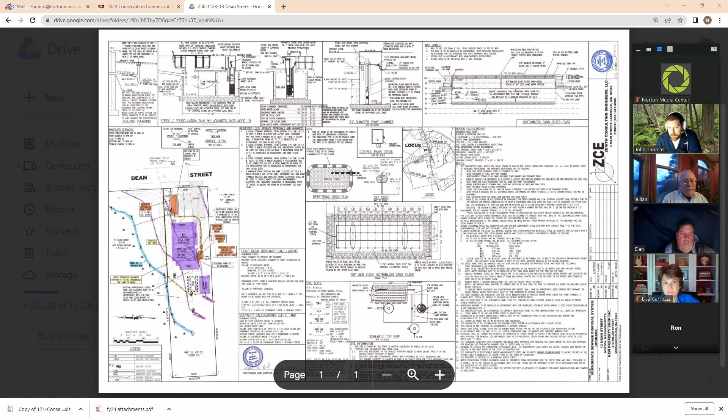Can everyone see this plan here? Yes, yes, okay. So the concerns that I had - I went out to the site, and the applicant needs to map the wetlands going from wetland flag 10 and going closer to the adjacent property because they actually come closer to the house. So I asked him to meet me out there tomorrow so we can take a look at it and make a determination on where the wetland boundary is supposed to be, along with checking on the status of the nearby stream, which is off the map to the left-hand side. It was flowing, I don't know if it's perennial at this time, so they'd have to make an assessment on that. So there's a couple unanswered questions they need to address for this application to be complete.

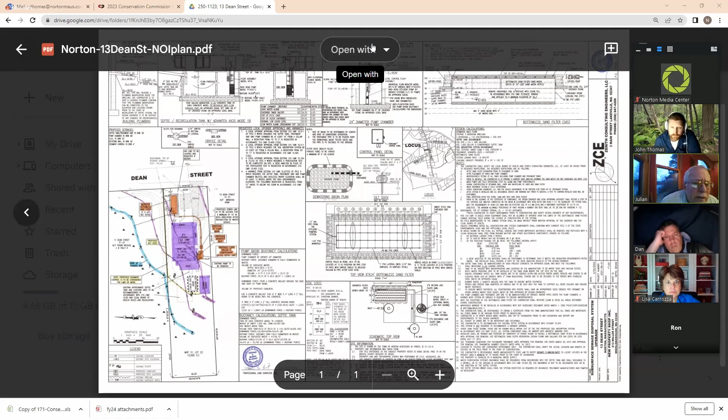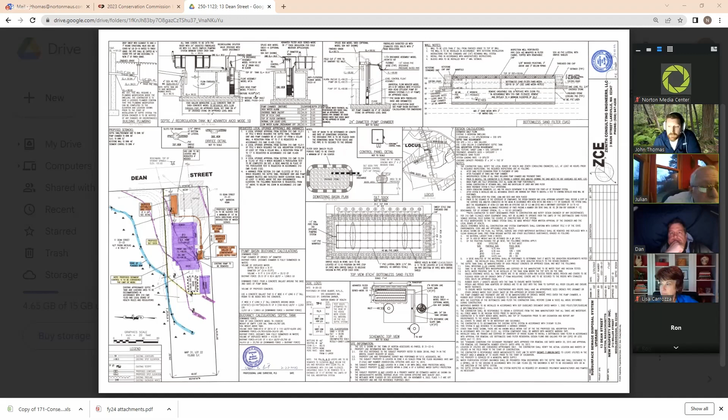There's that box in the back with the dotted line around it, and it says, I guess, to receive dewatering water from the front. Is that... you're talking about the D-box for the SAS system? No, in the back - so you have the house in purple, and then another box in purple behind it, and adjacent that box is a rectangle with a dotted line around it, and that's to receive dewatering water, is that right? For the septic system? I'm sorry, I don't know what you're talking about for the box. Well, you see on the plan, yeah, the house is in purple, yeah.

There's an existing garage in purple, and right next to that garage is an illustration of the dewatering basin. See detail. All right, so that gets pumped around from the excavation in the front.

Is that the idea? So my understanding from this whole plan, and the applicant can present the findings, is that the septic system is going to go on the front of the house. They're going to abandon the existing septic system, which is currently in the back of the house. I don't know what the dewatering basin is for, because they shouldn't be doing any work over there, and I don't know what the status of that is either.

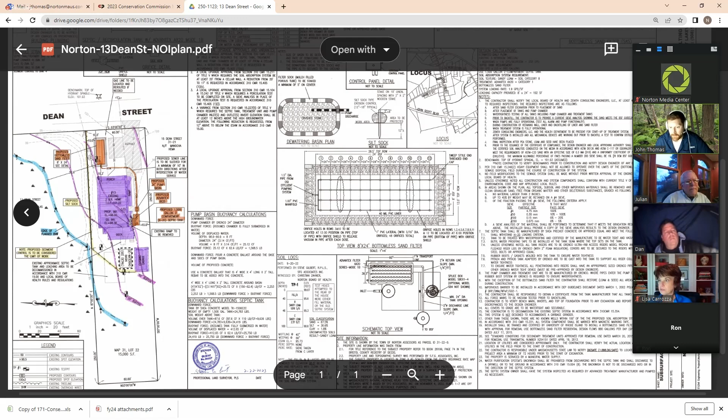What I do know, and my concerns are, is that there's a wetland that loops around and horseshoes up closer to this house on the right-hand side. They need to make sure they meet the Board of Health setbacks from the wetlands. It's 50 feet, so they have to meet that at all times, and there's no exception for any waivers. So their design may change based on that setback. That was the concern I had for them, that they need to address the wetland delineation. That's why I'm going out on Wednesday to confirm the wetland delineation and also continue and finish the delineation itself with the applicant.

All right, so we raised some questions. I think we detailed the additional information that we're going to need, and we can now consider a motion for a continuation of this hearing until March 27th.

So moved. Second. We have a motion made by Dan and seconded by Lisa. Roll call vote, starting with Dan and Tama. Aye. Aye. And Mark and Ron. Aye. And I'll throw in an aye. And Lisa, how do you vote? Aye. All right, motion carries. This hearing is continued until March 27th.

Next hearing is a continued public hearing, notice of intent, file number 250-1113, for 0 East Hodges Street. They also request a continuation until March 27th.

So moved. Second. Motion made by Dan, seconded by Lisa. Roll call vote, starting with Dan and Tama. Aye. Aye. And Mark and Ron. Aye. Aye. And Lisa. Aye. And I'll throw in an aye. So that motion carries.

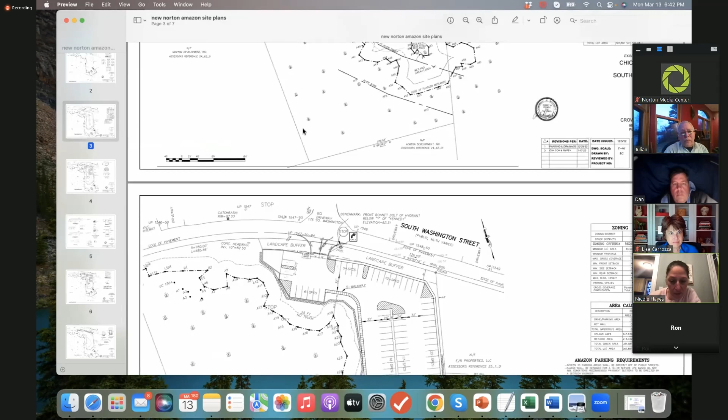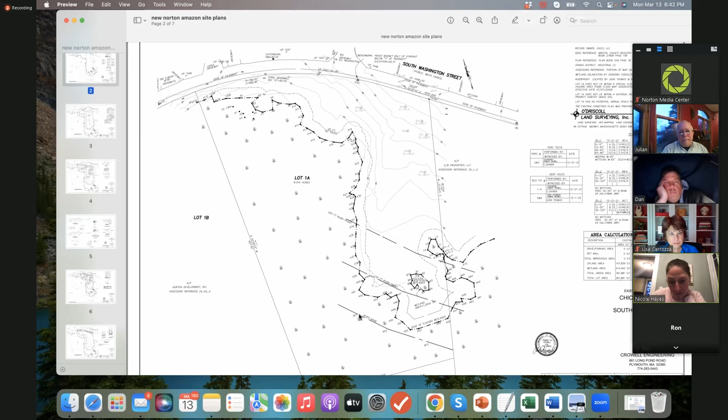And now it looks like it's, okay, we got it. All right. So this was the existing line here. We did an ANRAD to solidify the wetland resources. We have an isolated wetland here. This was joined into bordering vegetated wetland during the ANRAD process. The river bank is down here. This is the 100-foot riverfront area and the 200-foot riverfront area.

So here's the proposed conditions. It's an Amazon parking lot. This little section right here is the proposed work within the outer riverfront area. Again, this is the 100-foot riverfront line, and this is the 200-foot riverfront line. So we're proposing 1,310 square feet of alteration, which is far below the 5,000 allowed, or 10%.

We have done an alternatives analysis, and we also did a performance standards analysis that was given to the commission last week. I can go over that with you if you would like me to go over that. I think if John, you think that would be helpful, you reviewed that?

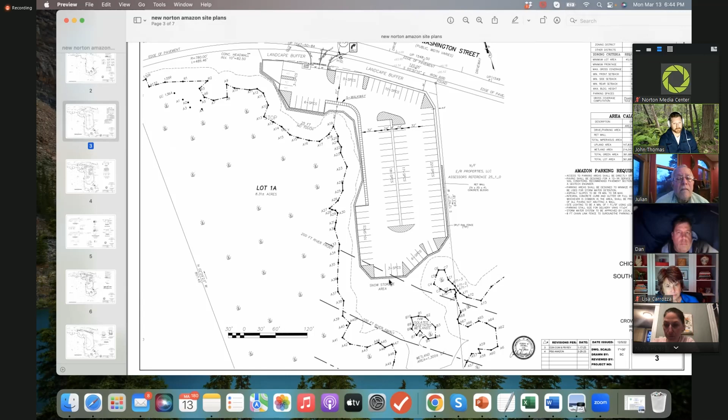Is that correct? I can let everybody know that the stormwater peer review consultant has reviewed the redesign, and he gave us a response, and he felt comfortable with the design as it's proposed, that it meets the stormwater standards. I guess the question is for this one, Nicole, do you have a grading plan for this? Let me see.

Like what the grades are going to be for? Well, you've got grades there. I'm just thinking, for instance, we got a parking lot at the edge of the parking lot in the riverfront area. My question is, is it going to be a raised parking lot, or is it just going to be on grade?

Typically those are built up significantly. So you got 89.7, 89.7. What's the existing grade there? 82. 82. So where's the slope? Where's the off slope for that parking lot? I guess that's my question.

So that implies that there's a wall. It implies that you have 7 feet of fill. So that's my question for this - you want to see the grading outside this area. I want to see the grading from what the design's going to look like. I mean, I need to see that to understand how much sheet flow and potential that's going to have.

I know the peer review consultant has already said this is sufficient, but for me, I would like to see what the grades are going to be along the edge of the parking lot to give me a sense of how much slope. Are we going to put riprap down for stabilization? Is it going to be grass? What's the stabilization going to be?

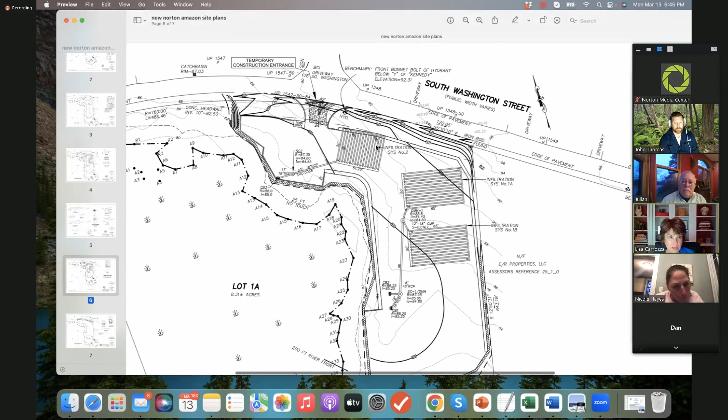Okay, well, I think the bigger question is how you transition from 7 feet of fill. You'd have to have a wall. Okay, so is that a wall that I'm seeing around there? On the southern end of the parking lot it makes no sense, because if that's 89, is that 89 proposed?

Yeah, 89. There's only the one proposed - the rest are all spot grades. So it's 89, and you have an 82 and a half, so you get almost 8 feet of fill.

Okay, so it's screaming for - you need a wall, you need something. Yeah, grading would be extending way out to get back into grade. You'd have a ton of grading back there. And that's what I'm getting at. I see that you guys have maxed out the design for the parking lot to get your needed spots, but what's going to be the slope stabilization for that?

Is it going to be a wall? It is a wall. It is a TOW, top of wall on the right-hand side. Oh, I see, 90.25. Okay, I see it there. All right, so is there a wall detail?

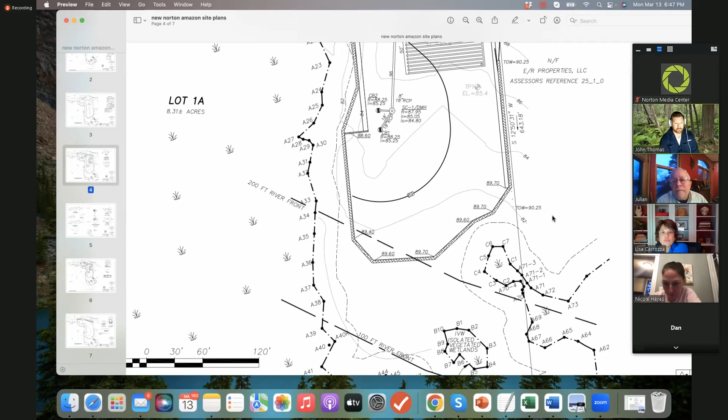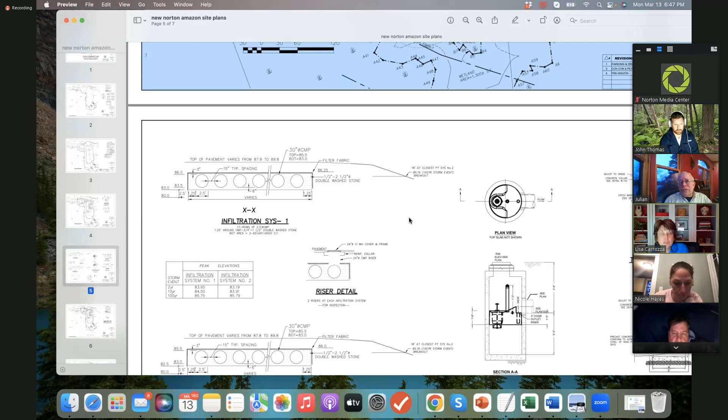And my next question is going to be, you're going to have to establish a limit of work. So how much area behind the wall do you need to disturb? Do you need to cut any trees down to get in there to build that wall? So you're going to have to ask somebody about how the wall is going to be constructed. All right, I can definitely get you all that information.

The engineer is actually away on vacation right now, or he would normally be on the Zoom call along with me. But I'm writing down all these notes, and I will ask him to reply to that with a grading plan, about stabilization and the retaining wall and limit of work, so we can get that information to you. Right, you'll need a suggested detail on that wall as well. Yep, detail on the wall.

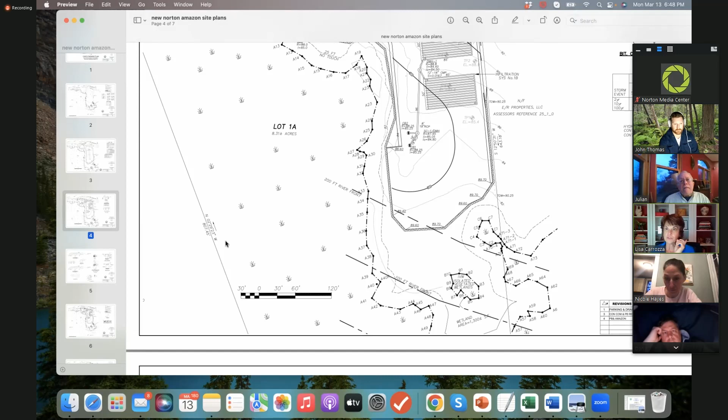Suggestion is to give yourself at least 15 feet off that 25-foot buffer to be able to construct that wall. It's going to be tight. So is that the top of the wall? Because now you're in the 25-foot buffer on the west side. So that's not the true representation of what the area of disturbance is, so you might have to pull it back.

Okay, now you're in the 25. I see what you're saying. Yeah, you're going to want to have a buffer strip between the 25 and the wall to be able to construct this thing, but also to maintain it in case there needs to be repairs. That's one of the main things that I wanted to touch upon. I understand the intent here, but realistically and logistically, I don't know if this could work.

All right, well, I will definitely relay that to the engineers and we will get you that information. So could you also - I know you went over the riverfront impact numbers, and I'd really like to see those on the plan so that we... Okay, that would be great. And then in terms of the alternatives, the first alternative is to avoid. So what measures did you take to avoid riverfront altogether?

Well, we had previously had a plan that didn't have any work within the riverfront area. Right, but the parking spots and the aisles weren't large enough for Amazon, so we needed to increase that, and that's when the work got pushed out into the riverfront area. So... Hello?

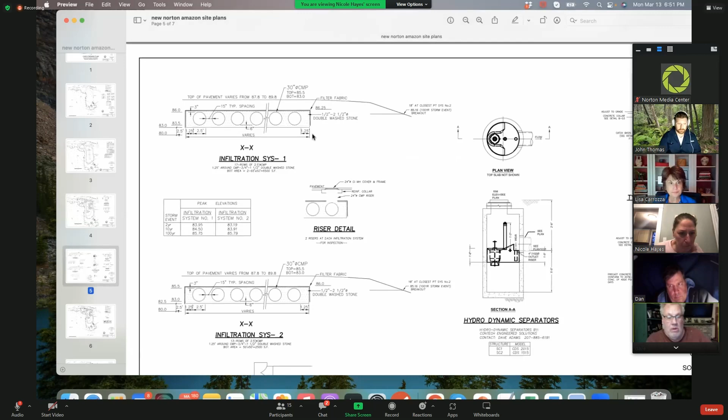I should have it, if you can give me a minute I can give you that, we'll need it on the plan. Nicole, do you have that in there somewhere? I'm looking at the detail, I'm on the detail page right now of the plan set.

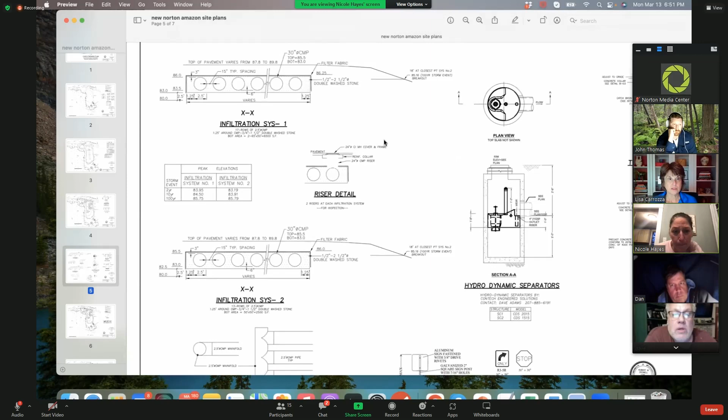We got signage detail, manifold detail, infiltration, riser detail. That's for the infiltration, those are all the drainage. There should be the grading, and I have seen that one before. If you go on, maybe if you can zoom into that, you can at least see the top view of it. There isn't a detail of the wall on here.

Right now, I'm going to let you know that that information needs to be provided to the commission, so that way they can make a good decision on this project if it was to go through. At this point in time, the commission doesn't have enough information.

I thought Bob Crowell told me that he had talked to you guys and had everything over there that you needed for this meeting. He sent me the information for this, and I looked at it, and the peer reviewer sent it back to me, but I'm looking at this right now, and I thought that the grading was good for this, but it doesn't seem like that's the case, all right?

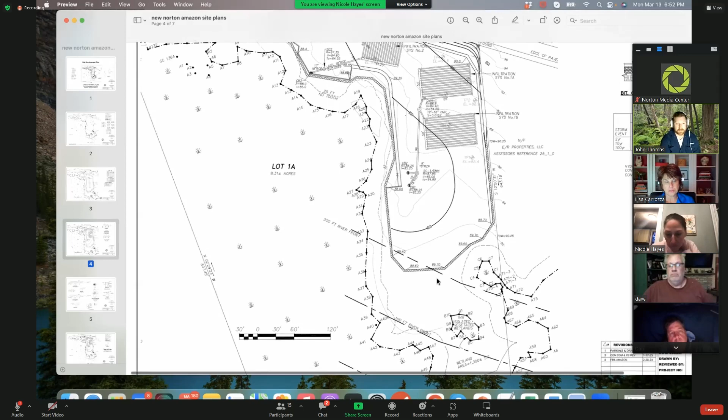Well, I think it does show the grading right there, doesn't it? See, I see all these topo lines. Okay, what's the bottom grade, you've got the top of the wall, but what's the bottom? On the outside, what's the grade? You don't have it, so I need that. I need to know what the bottom end grade's going to be on the opposite side, where's the limit of work? I need to know where that is. There's too many loose ends here that, if the commission wanted to, they could just say there's not enough information for this project right now.

I'm trying to assist you and help you out here and trying to get you the information, but I need that information for the commission. I understand that, but Bob has worked with you guys, I don't know how many times, and gone back and forth and said, do we have everything we need for this meeting? That was the initial design before Amazon came back and said that they needed the area and footprint bigger. He had talked to you and had everything you needed.

Bob has not talked to me at all, no one has talked to me. They sent this over to me, and I looked at it briefly, and I didn't even know if we were going to be on this evening to talk about this because you're still in front of the planning board. So that's the other question, I don't know what the story is with them. But as of right now, this is a brand new project with work in the riverfront area. I'm looking at it with fresh eyes, fresh perspective, and there's some inconsistencies with the information that I have in front of me right now.

Well, maybe you guys can go on to the next one, and I'll see if I can get Bob on the phone. Okay, so just be mindful also that your work zone on the east side, we probably don't have enough room to build that wall without trespassing on the eastern property line, once you figure out what your limit of work is going to be to build that wall.

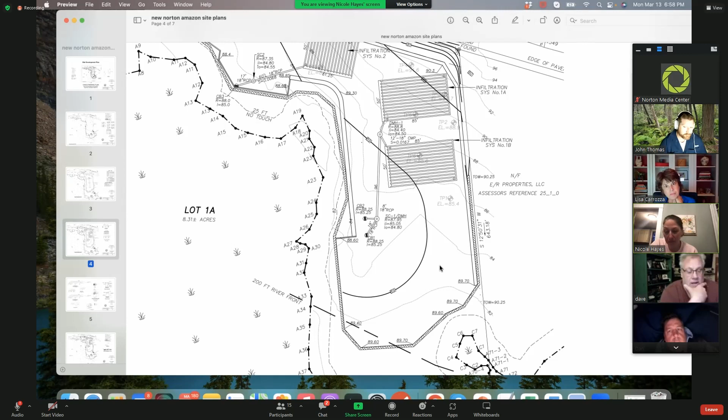Bob, you there? I'm here. All right, where's the microphone? Can you guys hear Bob? Yes. Speaker — do you want... go ahead, hey Nicole, do you want me to ask Bob the questions that the commission was asking?

Well, maybe we could start with John Thomas. Bob, John has some questions — I thought everything was all settled before we went into this meeting tonight. And he's... I thought so. Yeah, go ahead. John, are you there? I'm here. I just, this is the first time I've really looked at this plan in great detail.

But I will say that the grades and everything on this, with the wall — I'm looking at the wall, and I have some reservations about how that wall is going to be constructed and how it's so very close to the 25 foot no touch. Are you there? The footing alone is not represented here, which means you're going to have to excavate behind the wall. You're going to have to have construction access from behind the wall.

I've been on a ton of construction sites. I've never seen a wall built only from one side. It's impossible because your footing... It's possible to build it from the inside? Your footing is not even shown here. Where's the footing? Tell me how far the footing extends. These walls — you take them out, put gravel down, it sits on it, and they're hollow on the inside. You fill them with stone. So there's no footing. I've had it done before.

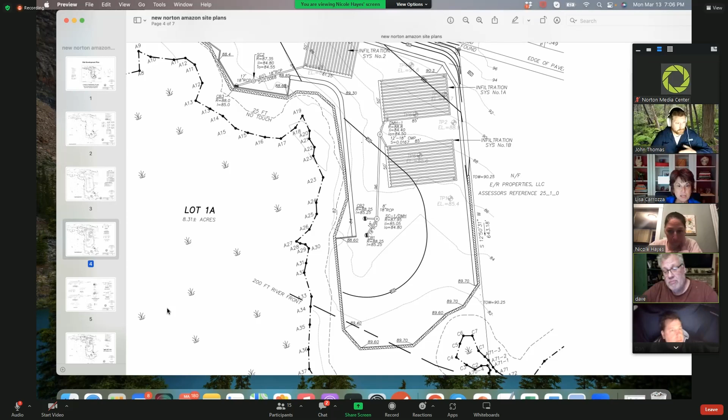And the last question I had was provisions for trash - do you have trash barrels or receptacles here? Yes, of course we do. Okay, and where are those located? There's a dumpster provided on all their sites. Is that shown on these plans? I may have missed it, I'd have to go back and look at the plans again.

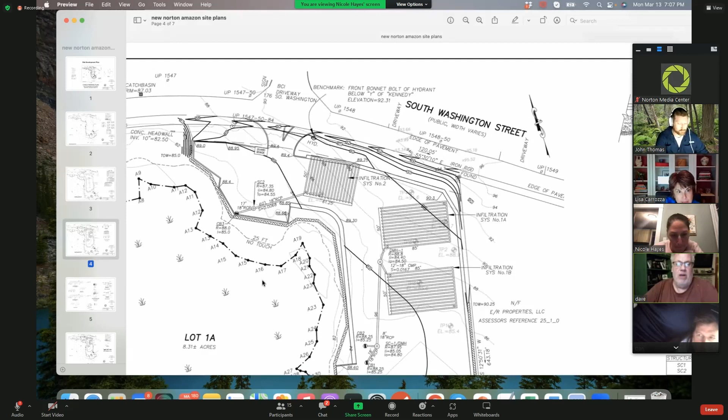I think it is up in the top there. Does it show a dumpster? Nicole, what's that say right there? It says guard shack. Oh, God, yeah. Well, the dumpster goes up to that area. All right, so whatever you want us to approve in this jurisdiction needs to be on that plan.

I think everything I'm - sorry, you're very muffled. One more time please - if you're proposing a dumpster in our jurisdiction, it needs to be on the plan. Okay, so whatever you want us to approve should be shown on the plan.

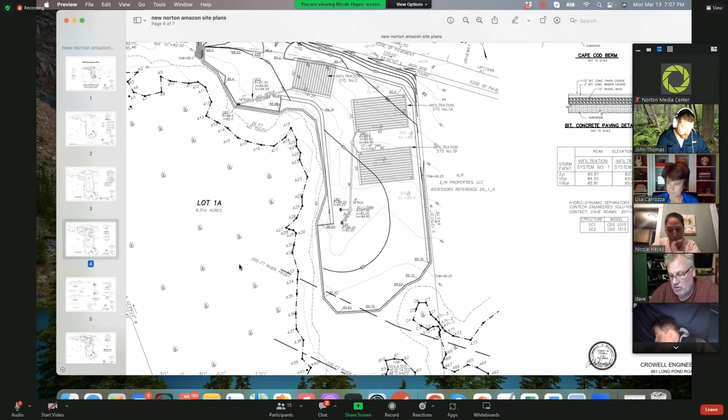Okay, so you need a dumpster. What were the other items, please? I have the list. Got it. Nicole, I think the solution is that not every parking space needs to be large for vans - you can make a hybrid situation that will reduce the impact, or avoid riverfront.

Can I ask one more question? Yeah, go ahead, move on to the next one. Included in the documents provided in the Google Drive is a well completion report. Maybe you can orient me to the location of the well. This implies the well's already dug. There is no well - that's why I wanted to clarify, because in the folder there was a well completion report. I wasn't clear it was associated with this, maybe misfiled. No, this is a parking lot, doesn't require a well.

Hence my confusion. Was that in the drainage report, Mark? No, it's in the first folder that you click in for this. Yeah, I saw that, I misplaced it. Okay, so it doesn't go with this project. Nope. Okay, thank you.

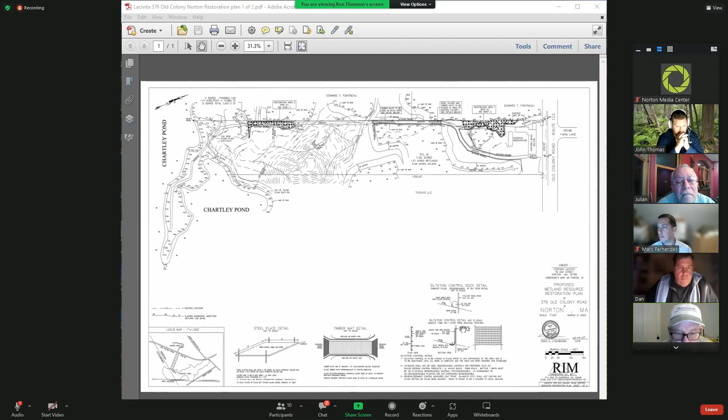That was something you wanted. The details on stamp, siltation, erosion controls. Let me get out of here and see if I can get the other one up.

What did I do? And then on the second plan, you asked for restoration notes and the procedures and how we were going to do it. They're included. This is my plan overlaid on theirs with the plant species, soils, tree planting details.

And in here, like I said, is the construction sequence. So, I mean, if you approve us to go forward, next move would be put the erosion controls out. There's like 2,200 feet of it. And then have John come out and inspect it. And with your permission, we'd like to start this cleanup so we can get it done.

So, John, did you review the notes and the sequencing? Are they adequate? I've looked at this, it's in line with what we discussed. Basically verbatim of what was asked of Ken to put in there. Looks consistent with procedures that I typically see.

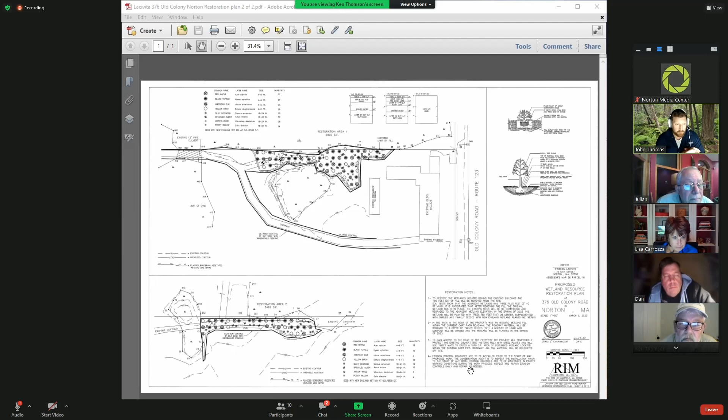Therefore, I'm comfortable with that, to let them go ahead with the project to alleviate some of the enforcement issues. So do we need to... all right, so we don't have to issue it. No, we don't have to, basically there's no vote needed. I don't think, it's just acceptance of the plans and giving your blessing to let them go do this work. Under my supervision, of course.

All right, I'm going to say I have no objection to the proposed plan. Does anyone on the commission want to raise concerns? And if not, we can assume that it's approval.

And if any of the members want to attend the process, they're more than happy to have them attend and see how it works. I know, Lisa, you've got a lot of experience probably dealing with this, but some of the other members may have never seen a wetland restoration project in place. So it could be a potential learning experience for some.

I'm sorry, do we have a specific date for that, John? Ken, when do you think you want to start going? Probably fairly quickly, try to take advantage of the colder weather. I'd like to get the fill out as fast as possible, especially in the front portion.